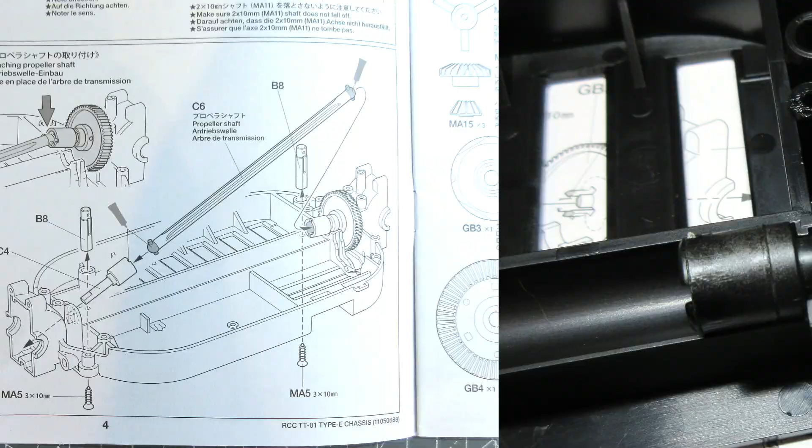Let's get cracking with step 1, attaching the spur gear. Once you've got all the right bits together, the only tricky bit is making sure the little MA11 shaft doesn't fall out while you sandwich it between the GB2 part and the GB5, which is the spur gear. Step 2 is attaching the prop shaft and the battery holder post.

This is kind of awkward and you have to angle the drive cups upwards to get the prop shaft in. Step 3 is attaching the motor, and I'm using this Razer 10 4600 kV brushless one.

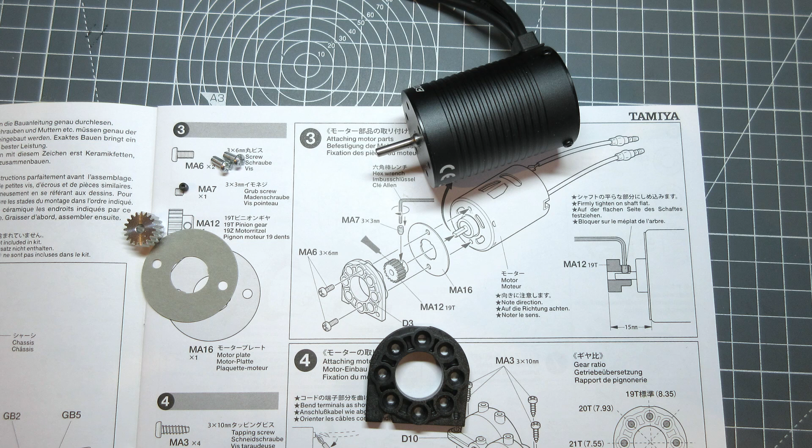You need to make sure you use the right holes on the motor plate for the size of pinion you're using. Step 4 is putting the motor into the chassis. At this point make sure the pinion and spur gear are meshing properly.

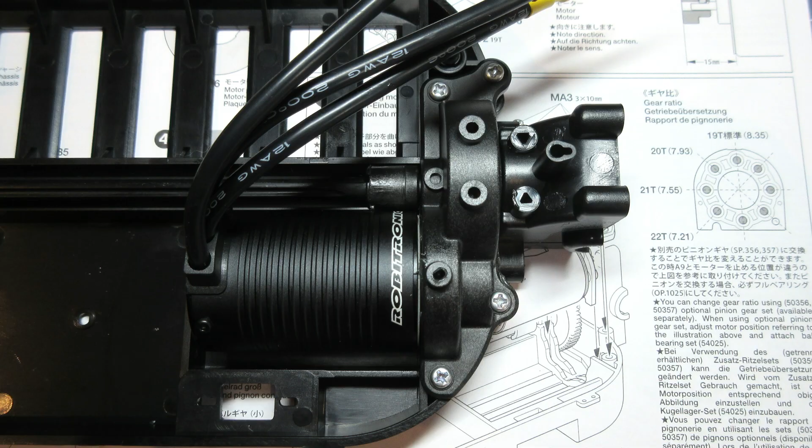Step 5 is putting together the rear differential. I'm going to use AW grease that will make the diff sticky and should make the truck drift a little bit.

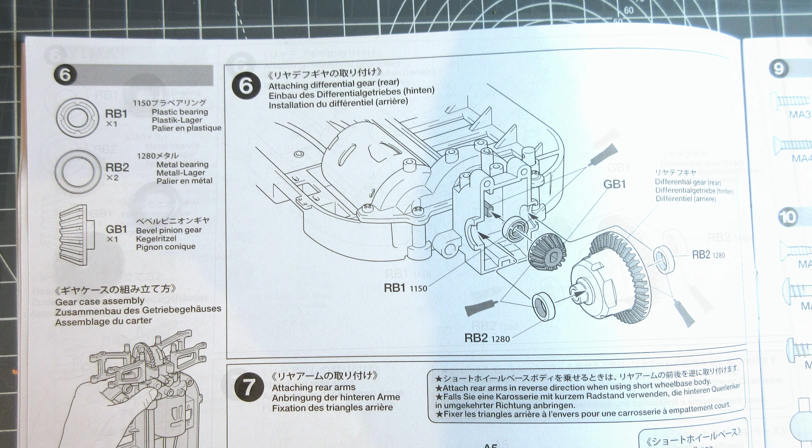Step 6 is putting the differential into the back of the chassis. Make sure the bearing's seated properly so the GB1 bevel gear can go all the way onto the end of the prop shaft. Step 7 is attaching the rear suspension arms.

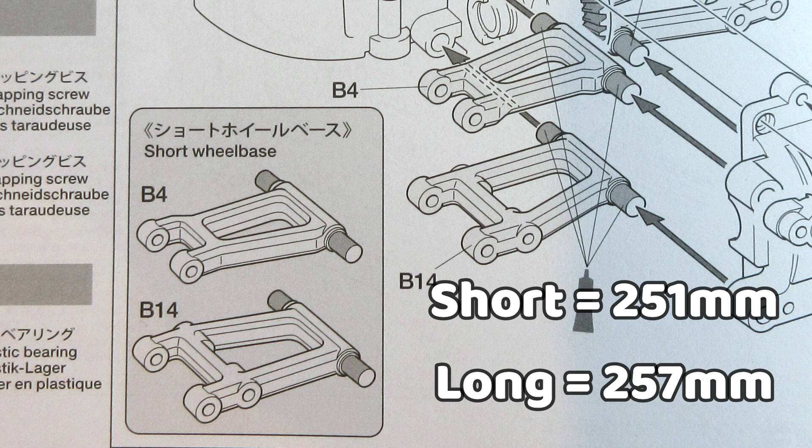The A5 part gets attached properly in a later step, but it's worth just putting a screw in it in this step so it doesn't fall off. Also with this step make sure the suspension arms are the right way round depending on what wheelbase you want, either 251 or 257. With this one it's the 257.

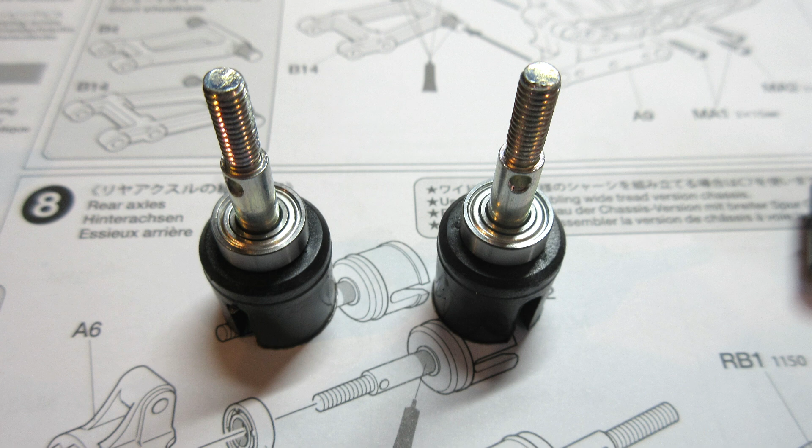Step 8 is putting the rear axles into the A6 uprights. Step 9 is attaching the rear bumper.

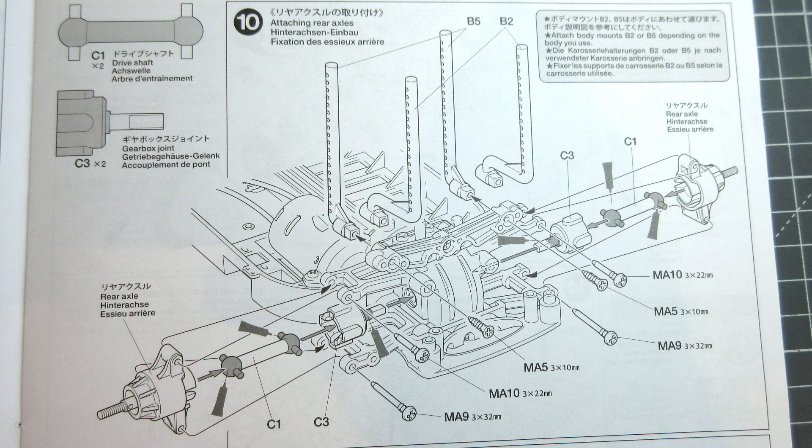Step 10 is attaching the uprights to the suspension, putting in the drive shafts and also attaching the body posts. Which body posts you need depends on which body you're using, in this case it's the B5s.

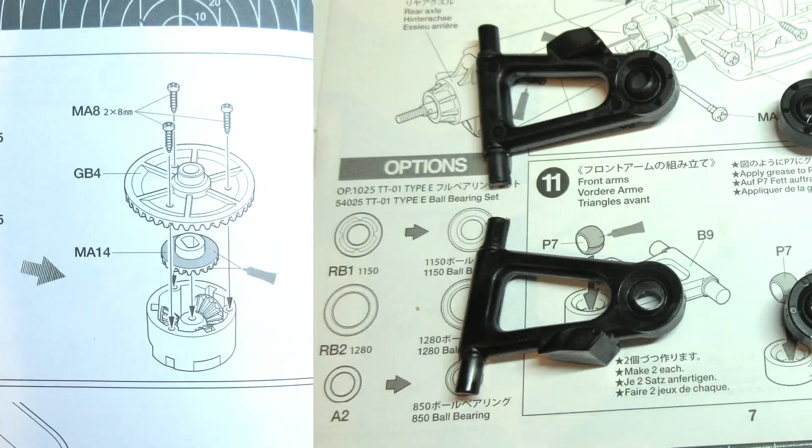Step 11 is just pushing the little P7 part into the B9 and B10 front suspension arms. Step 12 is the front differential, which is the same as the rear one.

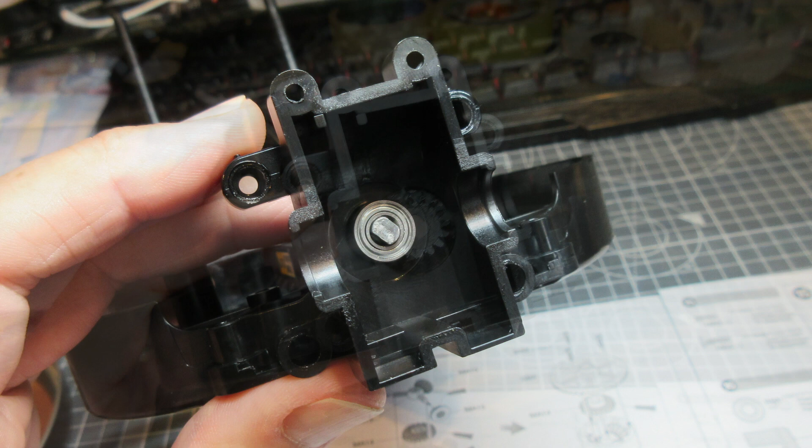Step 13 is very similar to step 6, but there's an extra bearing and the P3 part. Step 14, attaching the front arms, very similar to step 7.

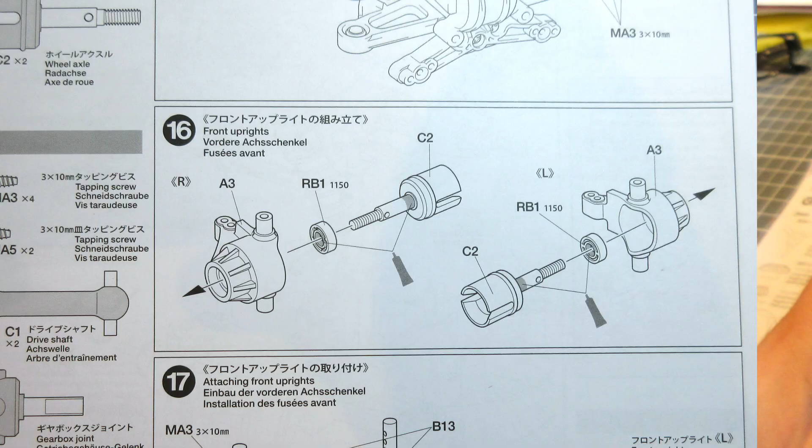Step 15 is attaching the front bumper. Step 16 is putting together the front uprights. Step 17 is attaching the uprights to the suspension, putting in the drive shafts and attaching the body posts.

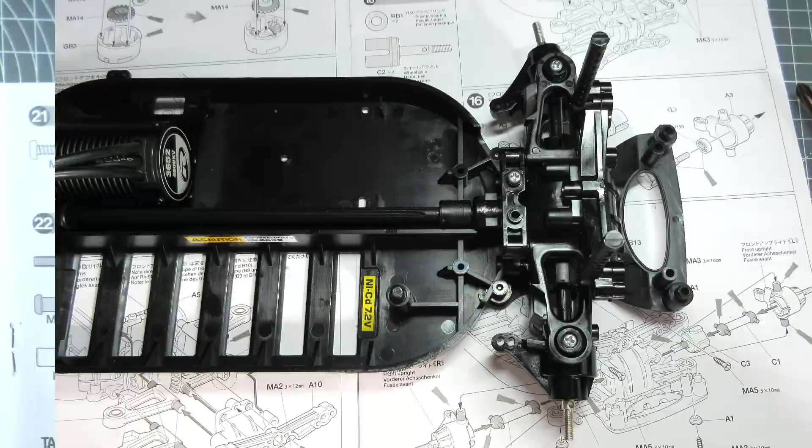Step 18 is assembling the dampers. I'm actually upgrading to these oil dampers, so I just need to check the kit one for length. I'm going with a single hole piston top, these springs, and 1000 CST oil. I found this to be a good combination in the past, so I'll see how it goes, and I can always change it later.

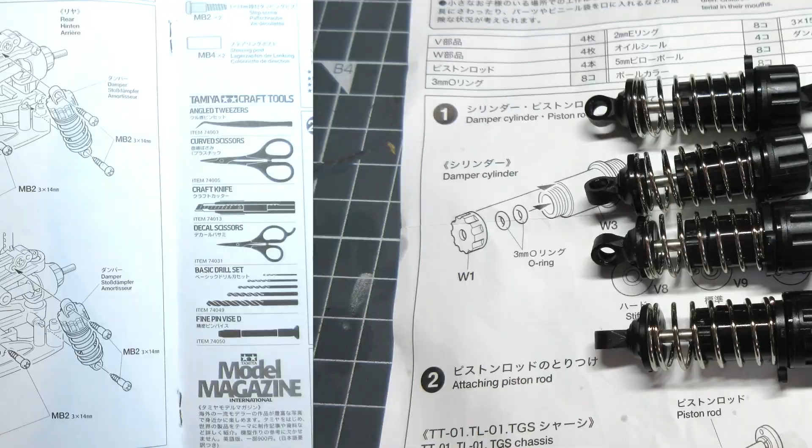Step 19 is attaching the dampers to the chassis. Instead of the step screws that you get with the kit, I'm going to use the ball connectors that you get with the oil dampers.

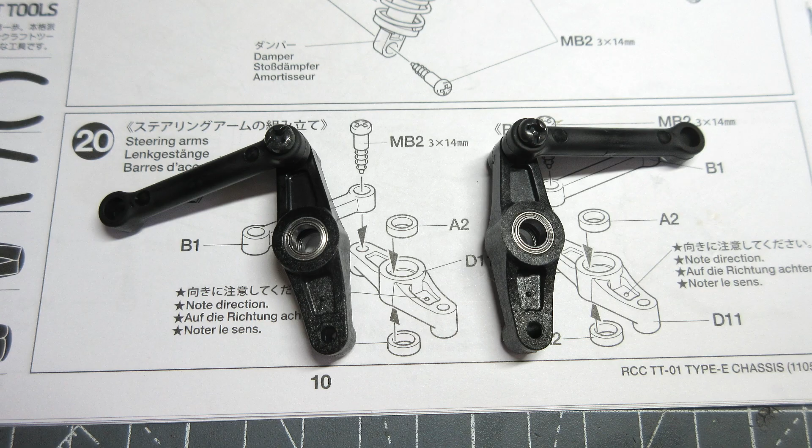Step 20 is putting together the steering arms. I've got bearings to replace the A2 spacers. Step 21 is attaching the foam bumper.

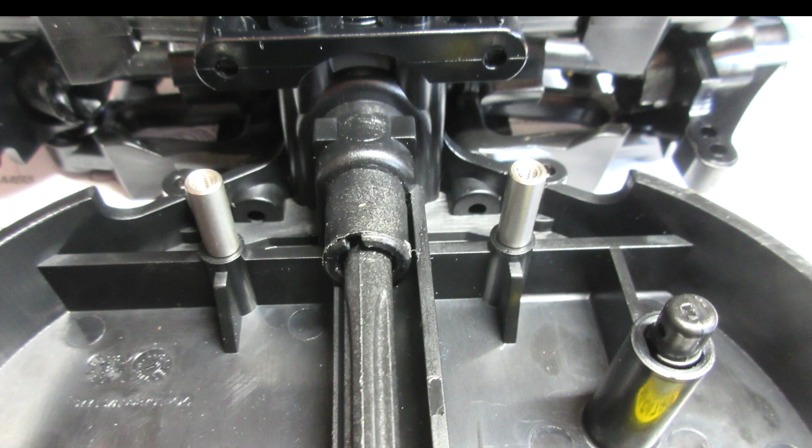Step 22 is attaching the steering linkage. Now step 23 we need to charge the battery, because in step 24 we're testing the radio gear and centralising the servo. Also in step 24 we're attaching the servo saver and the steering linkage to the servo.

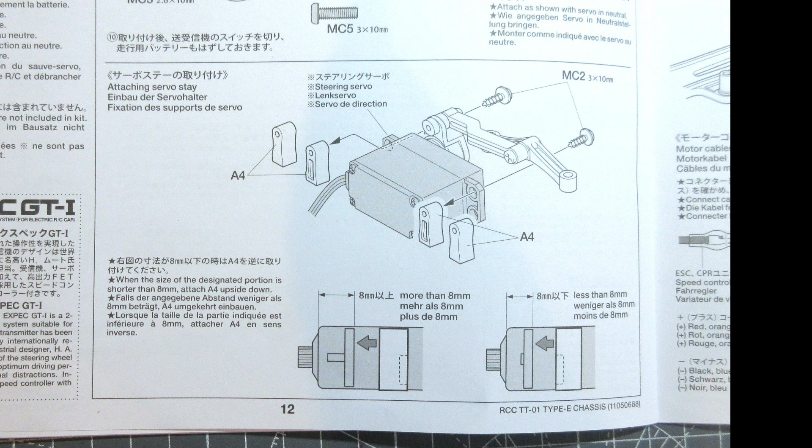We need to choose which way round these A4 parts go depending on the size of the servo you're using. Step 25 we're putting the electronics into the chassis. This is a good chance to give it a little test to see if everything works okay.

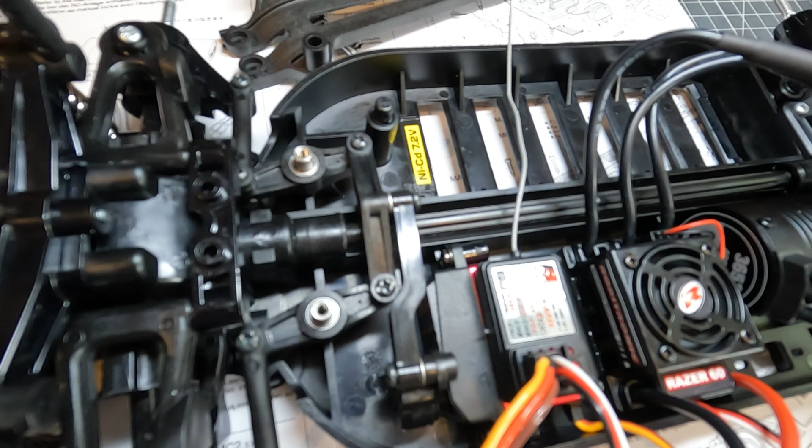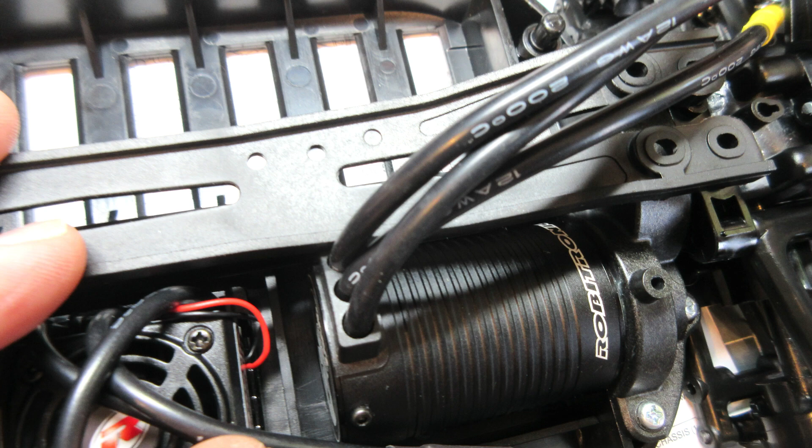That all seems fine. Now when I came to fit this D1 part I found the motor wires were kind of in the way. With these brushless motors you get multiple hole positions, so I just put it around to the next set of holes. I've left off this D8 motor cover.

Step 26 we're gluing the tyres on. I'm just using regular pound shop super glue. Step 27 is putting the wheel hexes and wheels on.

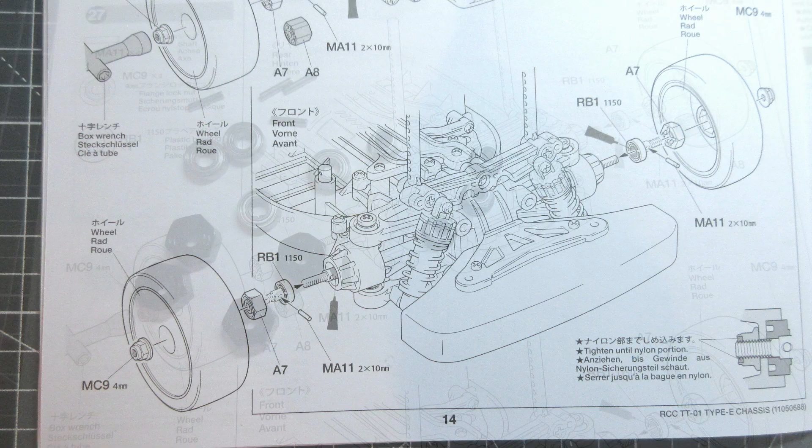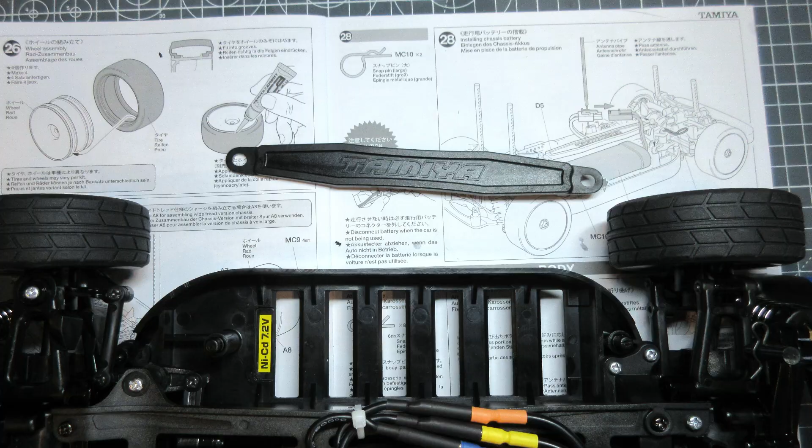This kit has got a back bumper that you need to paint and attach to the back of the chassis. Step 28 is putting the battery in and putting the battery holder on. So that's it for the chassis, and it looks pretty good to me.